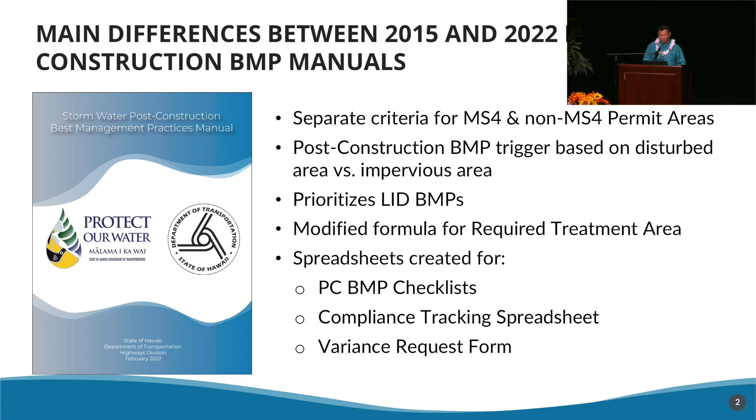We do have the links up here. If you visit the Oahu Stormwater Hawaii website, you can get some resources here. There's also a website for Stormwater Maui. If you click on the designers and contractors link,

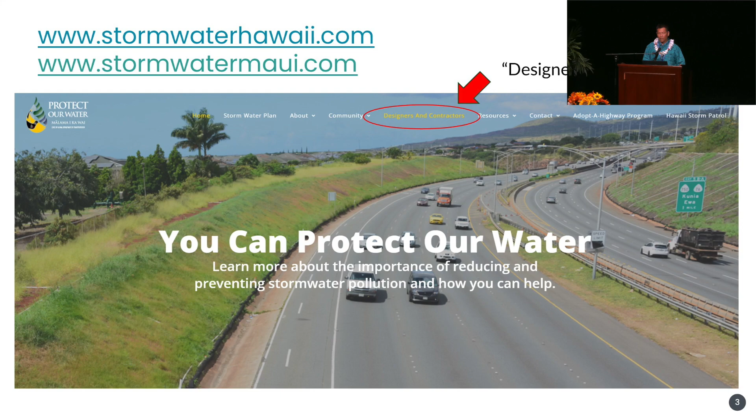that will take you to links that you can download to reference the 2022 manual. There's also links for videos and prior conferences that you can access for guidance, as well as some videos from 2023, and the 2015 original manual too for reference.

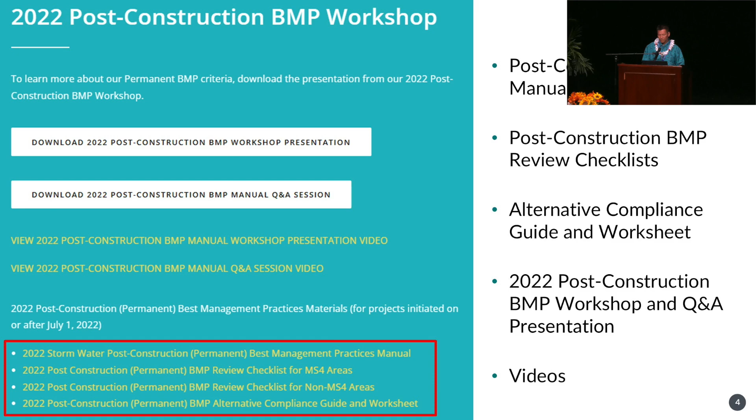This is a slide that I've used before because it is a journey, and we're always updating it and kind of tweaking it based on feedback we've gotten and questions. The initial workshops that we've done, because we changed the methodology, were a lot more technical — we went into the formulas and really into the weeds about the changes. But the latest updates are more just to be user-friendly for the user.

And so we did updates to the MS4 permit area checklist, the non-MS4 checklist, as well as the compliance tracking. Richard's going to talk about some of the local and nationwide trends that we've been seeing in the stormwater industry. This picture here is one of the bioswales that we've done near the H3 Likelike intersection.

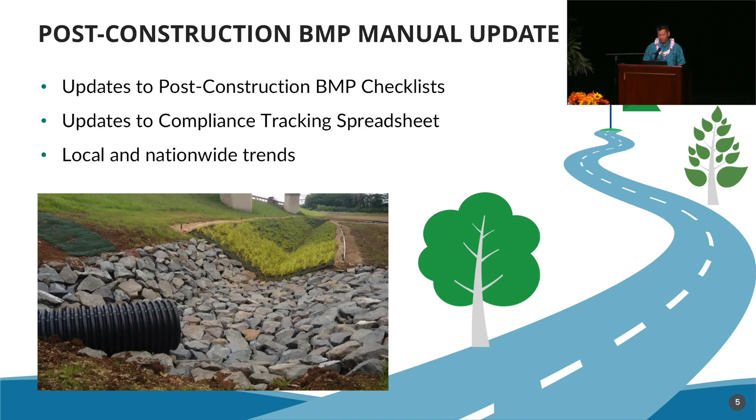Some of the general changes to the post-construction BMP files that were made.

So we've added several tabs along the bottom, and this is what you'll see when you open the Excel spreadsheet. So there's the overview and guidance tabs that have been added. The intent for these is to make it easier for the user, so instead of having to flip back and forth between the actual manual and the spreadsheet, we included some tips on how to navigate through the tabs.

You'll find within the spreadsheet there are the checklists included, as well as the tracking spreadsheet, variance request form, and then there's now separate files, so the user will have one file that they can fill out. And then from the DOT side, they have another spreadsheet that they use to track files on their end, and that's generally just for compliance.

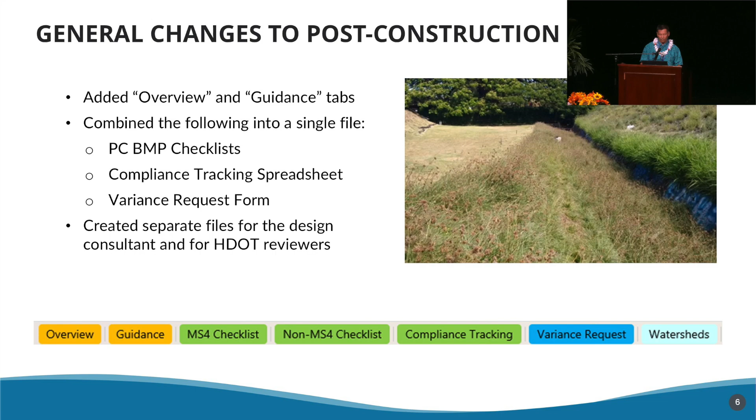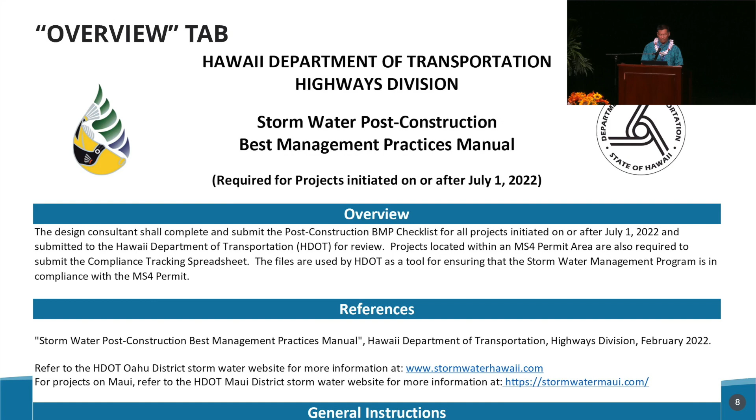So the overview tab is just instructions on what files are included. It does have some links for the Oahu and Maui websites for a quick reference, and then also instructions on how to navigate through the different tabs.

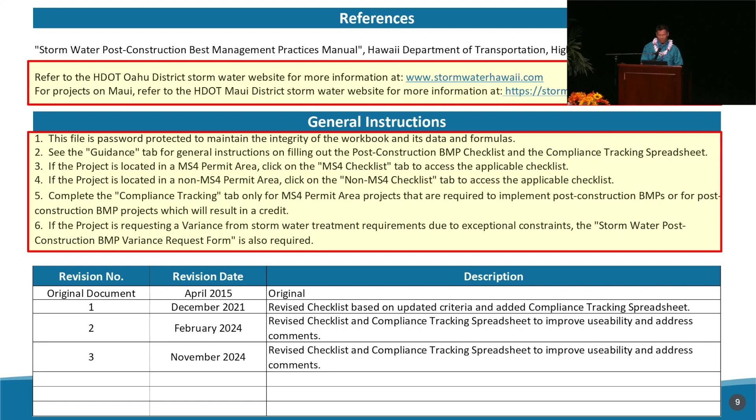The guidance tab is probably the one that you're going to find the most useful. So we did add colored cells throughout the worksheet. You'll find that the yellow ones are where the user adds in their information based on their project. The green cells are locked out because they either have formulas or they're going to be filled in automatically.

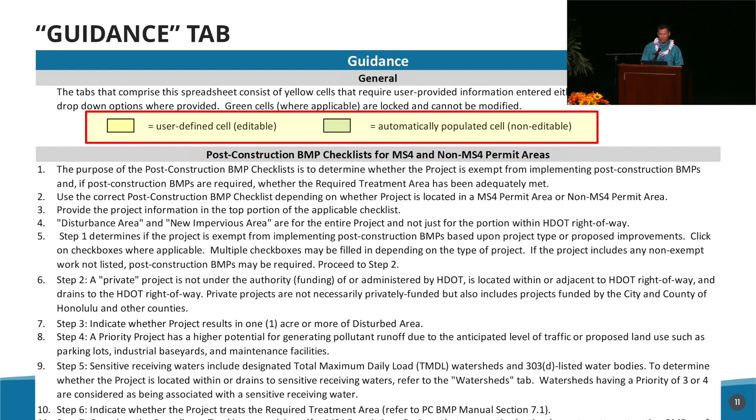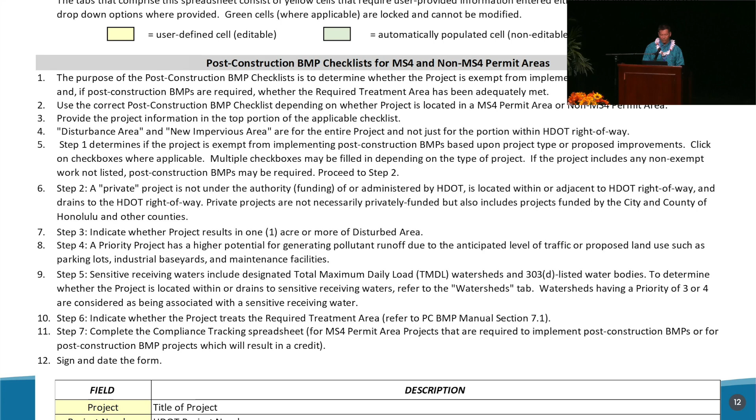And it has instructions for each of the different worksheets. So for the BMP checklist, we do have a series of steps that you follow. Apologize, we have not integrated AI yet, so you do have to fill it all out. There's not going to be an automatic feature, at least not yet. But you have to follow step by step, and hopefully it's pretty clear as far as what you need to do. Once again, it's mainly so that you don't have to keep referring back to the manual.

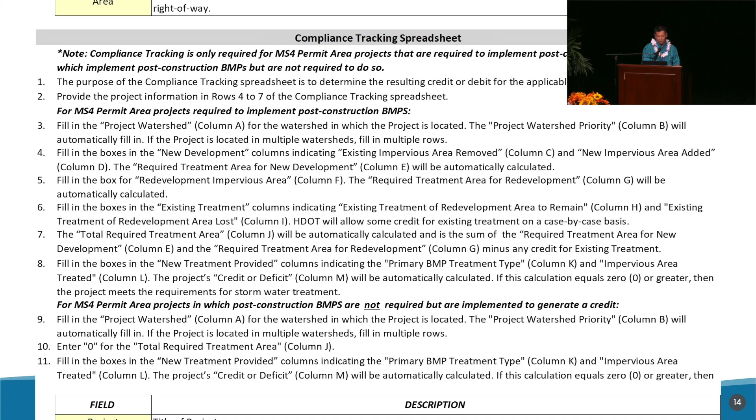So we do have the fields, a lot of the terms that are used within the worksheet, and the definitions. And then also we added some steps for guidance for the compliance tracking spreadsheet, more descriptions and definitions, and some links are included. The goal for the tracking spreadsheet is to compute how much credit or deficit is resulting for your project.

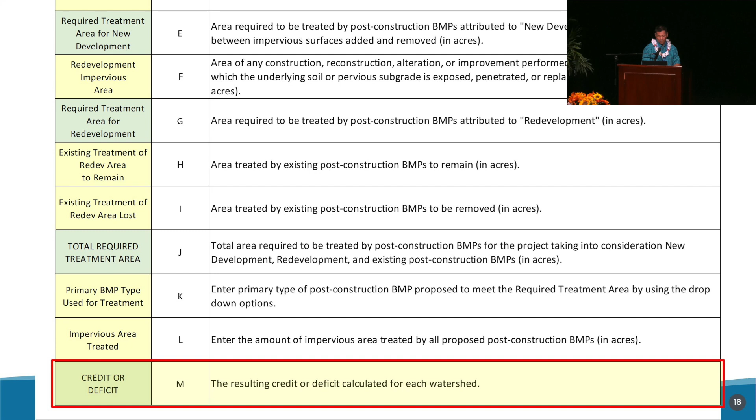And then lastly, we have instructions on the variance request form.

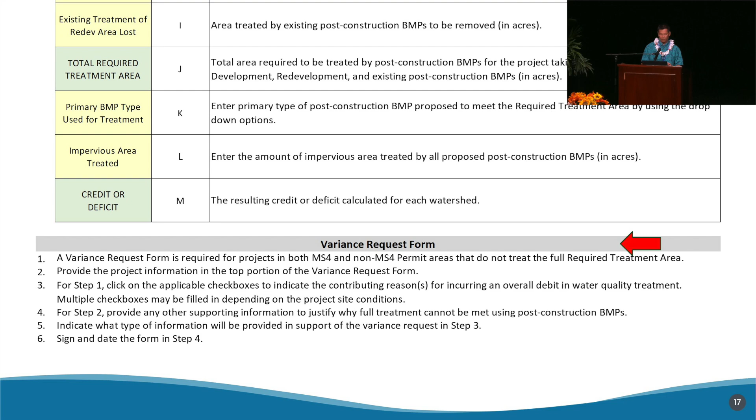So most of the questions we have are on how to fill out the post-construction BMP design checklist. These are the questions that come across either from the DOT side or from users that we've heard. As a reminder, the checklist itself is required for all projects initiated after July 1st, 2022 that need to be reviewed by HDOT. We do have separate checklists, so make sure you use the right one, whether you're in an MS4 permit area or a non-MS4 permit area.

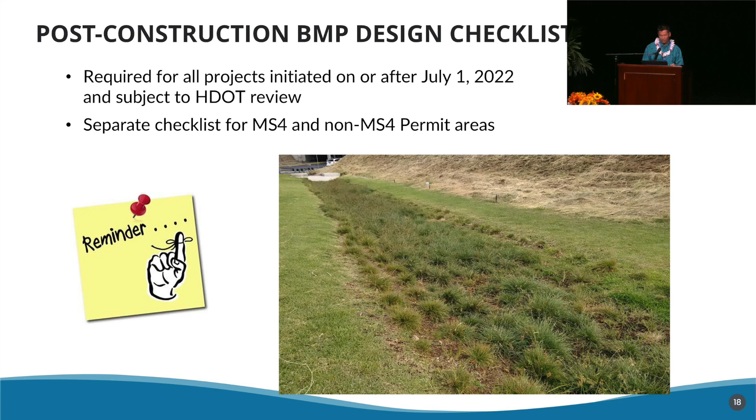I'm going to go over the MS4 permit checklist. The non-MS4 one is pretty similar. So we added some drop-down menus to make it easier to enter in information. The yellow is where you have to add in your info. One of the first questions we get is, how do you determine which watershed your project is located?

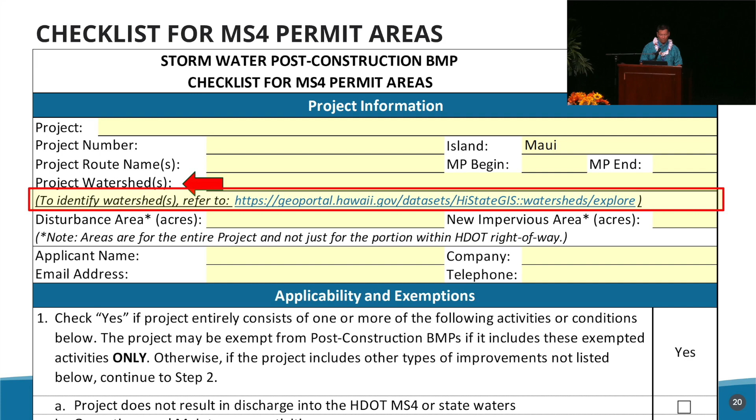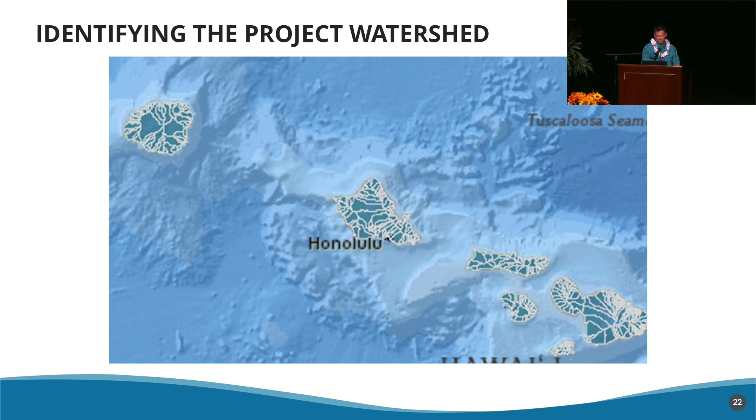So we added in a link, and if you click on it, it'll take you to a GIS website. It's pretty cool, as you scroll around you'll find it'll highlight the different watersheds and flash up which watershed that is. So whichever your project is, if it spans more than one, make sure you enter in all of the watersheds in that blank.

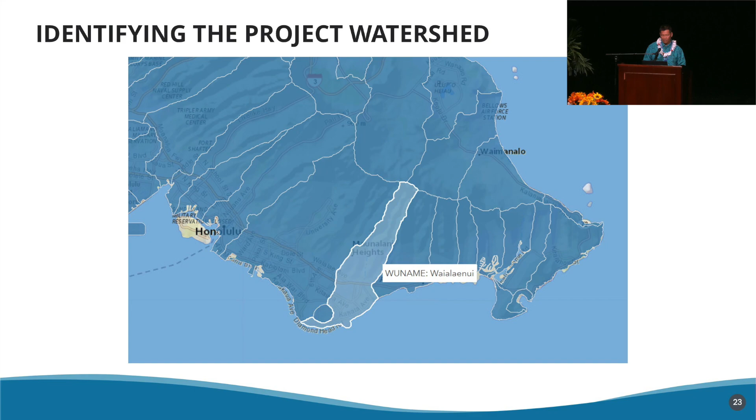And then continuing down on the checklist, step 1 is intended to determine whether your project is exempt from implementing post-construction BMPs.

So the first question is, does your project discharge into the HDOT MS4? If not, your project is exempt.

That's pretty easy. One of the questions we've always been getting is about erosion and sediment control. So to go through the exemptions, if your project includes work that is not included on one of these exemptions, then it needs to be assessed for post-construction BMPs. So even though your project has erosion sediment control, you're not automatically exempt. For example, if you're doing a 2-lane road, just because your project has erosion sediment control, it's not exempt. So you need to indicate all of the items that are within your project.

If your project is exempt, you continue down to step 8. If not, you continue to the following steps, number 2.

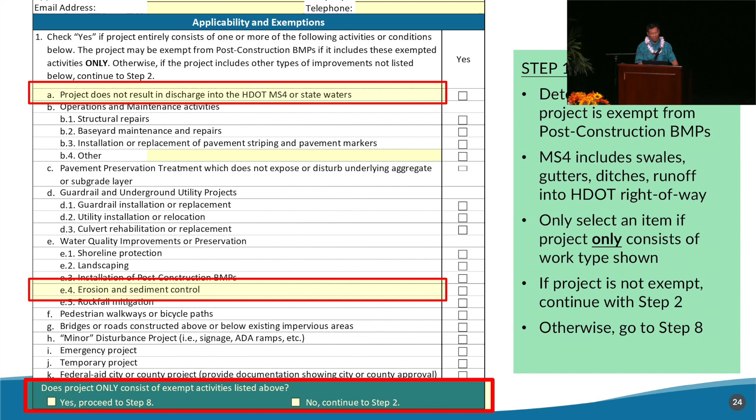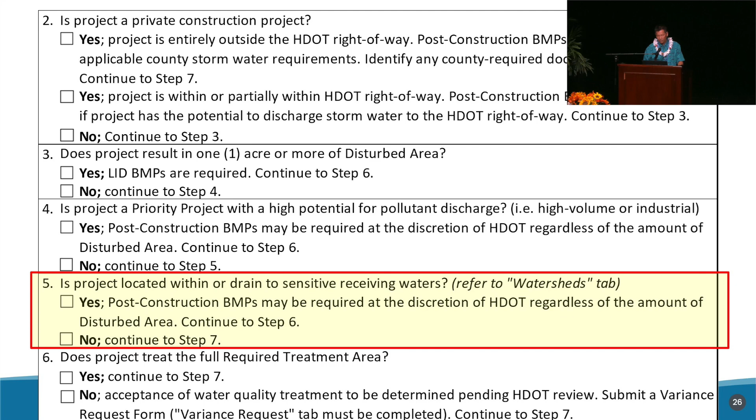Okay, and then these are more steps that you follow to determine what is needed for your project. One of the other questions we get is, how do you know if your project is within or drains into a sensitive receiving water? So we added another tab here for watersheds. Based on your watershed, each watershed has a priority ranking, and if you have a priority of 3 or 4, those are considered a sensitive receiving water.

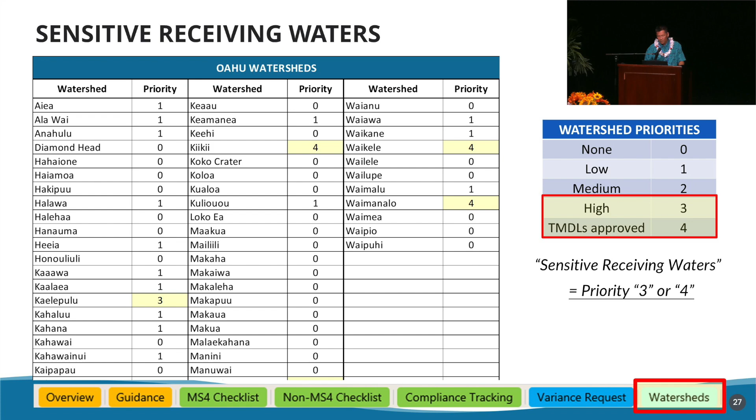And these rankings are based on the State of Hawaii Water Quality Monitoring and Assessment Report. It's updated every 2 years by Department of Health. They do a series of testing for pollutants, and that's how they come up with their ratings. There's a link here if you want to take a look at it.

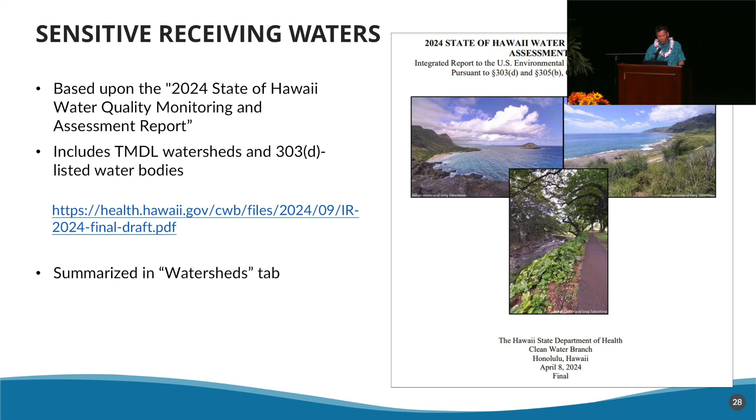The signature from the designer should be someone who's knowledgeable of the project. We want to make sure the information provided is accurate. And then the steps down below are for the HDOT reviewer.

Initially we had three outcomes, but we added this 4th one. So the different outcomes are: the first one is if your project does require post-construction BMPs, and if it does meet it, you're fine. The second option we have highlighted here is the new one we added.

Some projects do not require post-construction BMPs, but they include them anyway to get the credit. So we do want to capture that credit for compliance. That option has been added.

Options 3 and 4 are if the project does not meet the criteria. The options are either you have to go back to the drawing board and add more BMPs, or if DOT thinks you're okay because there are constraints preventing you from meeting that requirement, your project may be open to using alternative compliance. Alternative compliance is basically using another project in the future to address the deficit.

And then for the reviewer, we also added another signature block for DOT branch head to sign.

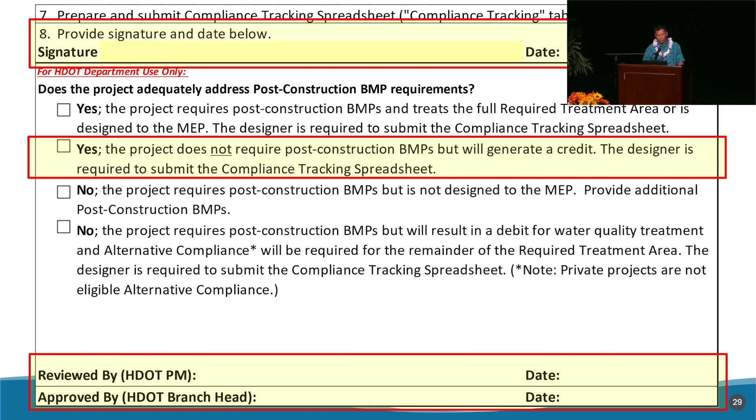In addition to making the files more user-friendly, we're trying to cut down on the paperwork. So one of the comments we had was for the post-construction BMP compliance tracking spreadsheet.

Before, every project that submitted for review needed to submit this as well. But we've narrowed it down, so you only submit this if your project is required to implement post-construction BMPs, or if your project is not required but you're adding them in to get the credit. We want to get the credit. So those are the projects that need to submit this spreadsheet.

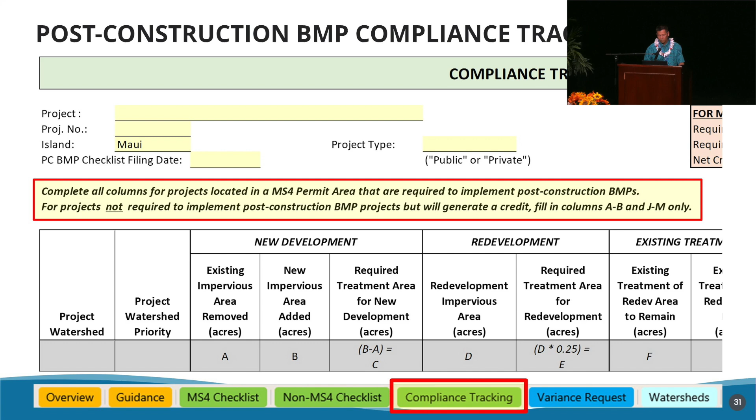And then the BMP variance request form. So if your project is required to implement BMPs but does not meet the required treatment area, this is just your way to justify why it does not meet that. And then DOT is going to review it, and if they approve it, you could be open to using the alternative compliance option.

As far as the timing, we anticipate updating the files and the manual itself and having them ready for public use, either first quarter of 2025 or the first half of 2025.

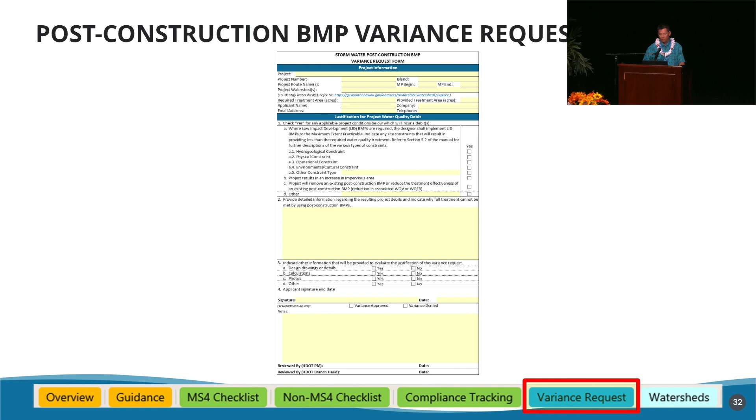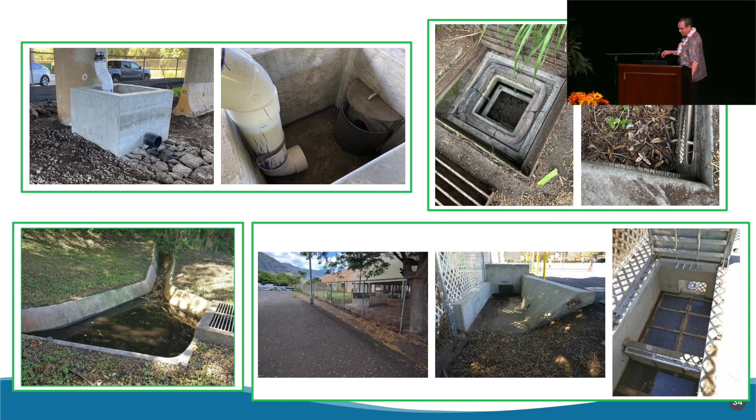I'm going to talk a little bit about trends in municipal permitting, but specific to our permanent BMP program.

I tend to get excited when I talk and jump around, so if I start getting over here and you can't hear me, throw something at me, and I'll try to remember what I'm supposed to be doing.

When we talk about post-construction BMPs, the requirements vary state by state. There's kind of different approaches to the permitting that drive it. In a lot of states, the regulatory agency, equivalent to the Department of Health here, writes their own compliance manual. In the state of Washington, where I live in Seattle, they have a very detailed 4-volume stormwater management program guidance.

That guidance includes a whole section on permanent BMPs, and they actually allow local municipalities to create their own manual, as long as it's at least as stringent as the state manual. So you have the state manual, and then the City of Seattle manual that adds some new twists and turns to it. Depending on where your project is, you have to comply with all of these different regulations, so it can get kind of complicated.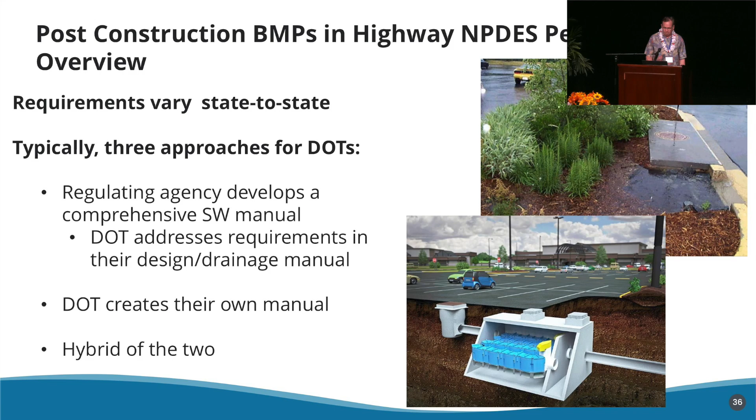Then there's some places where it's kind of a hybrid of the two, where the state provides some level of guidance, and there's bits and pieces of the manual here and bits and pieces there. It can vary, and that affects how you implement and run your program.

In terms of trends we're seeing in post-construction BMPs, anyone here that's been working under a stormwater permit for more than 5 years has seen the process where every time you get a new permit, they tighten the screws a little bit, things get tougher, and there's more requirements and new things you have to add. It's true in the permanent BMP world.

One trend across the country, I think, is reducing the size of the trigger for your project. The City of Seattle, for example, if you have 750 square feet of disturbed area, requires drainage review, and they have a whole green stormwater infrastructure, LID checklist you have to go through to prove that you can't do permeable pavers, rainwater harvesting, a rain garden, or whatever other options might be, before you're allowed to get an exemption and move forward.

Within that review, they have multiple trigger levels, because that's just the simple green stormwater review. But if you then have 2,000 square feet of new or replaced impervious area, you're required to do permanent BMPs, like a Contech StormFilter, or any one of these other treatments, either in addition to or as an amendment to the LID work you do.

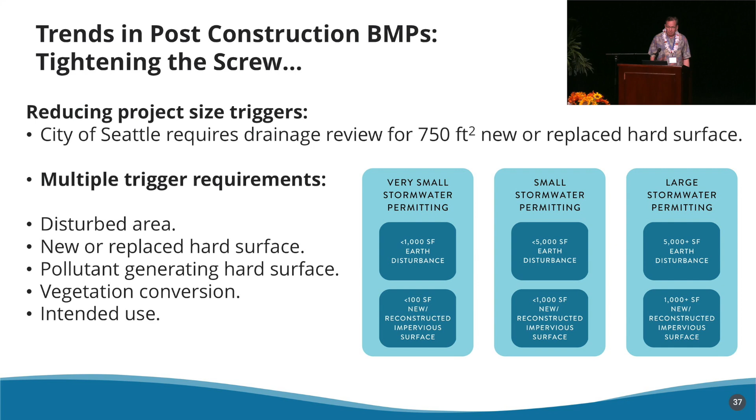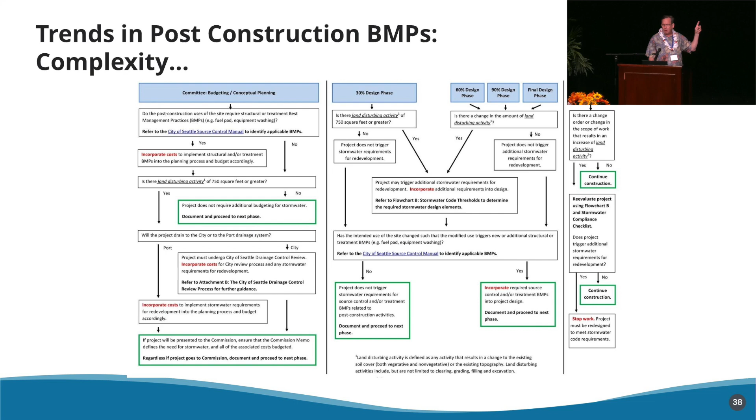And this isn't even the whole flow chart, because if you get to the wrong box on this one, then it sends you to another flow chart and you've got to work your way through that too. So it's an involved process.

So I think the word for the wise is, in the future, you can probably only expect to see more interest from the regulators in seeing you do more and adding complexity to how you do this. So for those of you who aren't as happy with Jason's spreadsheets and the requirements we have in there now, realize that we're still getting away pretty easily here in Hawaii.

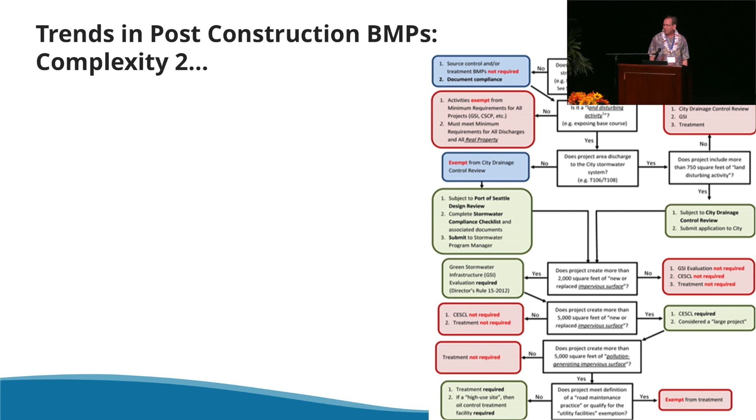The other way this is often done is a developer will come in and put in a regional treatment system that treats a whole huge area, even if they're not developing it all today. Very similar to the credit program Jason was talking about, in that if they have a 40-acre site, they'll put in treatment for the entire site, and it may take them 5 years to develop that all out. In those 5 years they might develop 10 acres, then another 10 acres over here, and then they get another tenant that wants to build a warehouse, and they already have all of that covered, so it facilitates their business process very well.

And typically you see greatly reduced costs, because instead of trying to build 20 little small rain gardens and fit them into the site you have available, it allows you to build at a larger scale and generally lower cost.

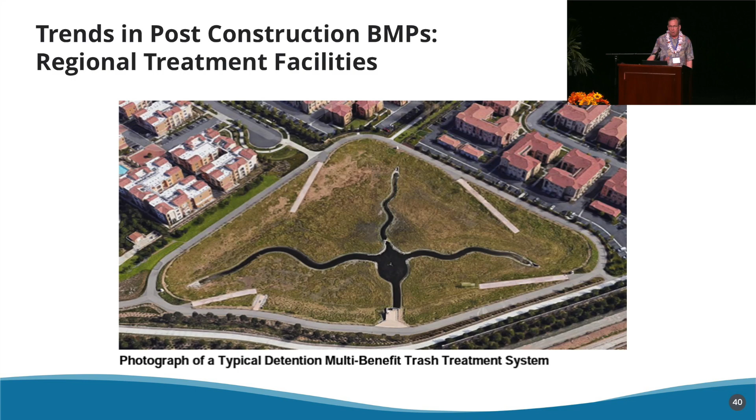The other trend in this is what they call stormwater parks. These can range—probably the most common one I've seen is soccer fields that are set up in such a way, with the elevations and floodplains, that in a really large storm they're able to divert stormwater and flood the soccer field 6 inches or a foot deep. That's a whole lot of water you're able to retain and infiltrate, or at least release slowly back into the stream so you avoid the impacts of the large flows.

The project I'm highlighting here is in the city of Tacoma, and they retrofitted a whole large area. I believe it's 754 acres that drain to this facility. It's a series of infiltration rain gardens.

Anyone here ever been to China or Japan? Lo and behold, it took us 2,000 years to come back to the idea of terracing our treatment down the hill, so we get some treatment and then drop it down into the next one, and it just stair-steps its way down the hill. It's in a park, and provides a visual amenity because you've got variation in the plants and the pathways through it.

And then I wanted to touch a little bit on new trends and permits that are maybe not yet affecting our post-construction BMPs, but will be soon. In Washington, our latest municipal permit has a requirement for avoiding disturbing PCBs and materials. Now, I thought we stopped using PCBs a long time ago, right?

We took them all out of the transformers and put double containment on everything that does still have them, and I didn't think it was an issue. I didn't even realize that back in the 50s and the 60s, PCBs were put into caulk and siding material and window gaskets. So we now have a prohibition against pressure washing the outside of a building unless you've tested the materials to make sure there's no PCBs in them, because that caulk is now breaking down, and when you pressure wash it, you're blowing pieces out, and the PCBs are leaching out of it.

It was an eye-opener to me, because I've been an environmental professional for 30 years, and I kind of thought there's a lot of legacy PCBs that we're still cleaning up because they're there forever, but they're now cracking down on it in stormwater permits as a pollutant of concern.

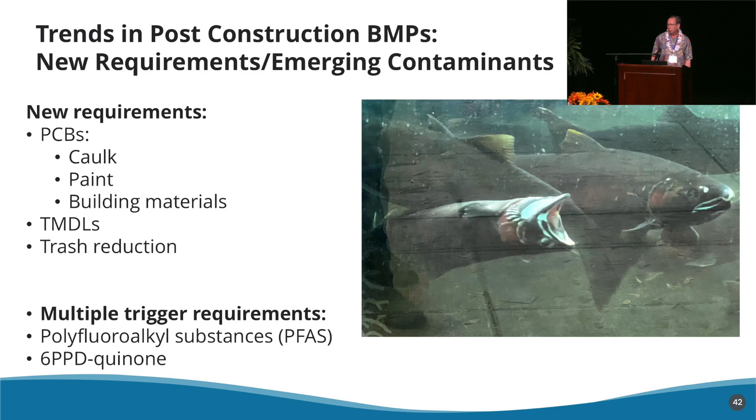The good news is it seems to be filtered out pretty well with bioretention, like rain gardens, and that compost sand mix soil mixture seems to sorb the stuff out pretty well. So that's going to be a big push, at least in Washington - we'll see.

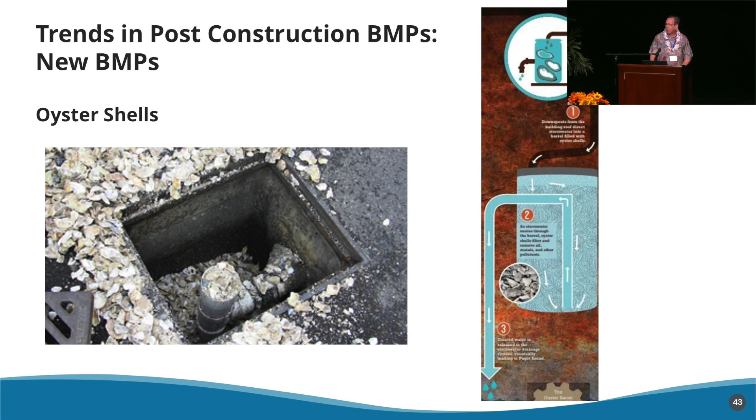And then I've just got a few pictures to show you of some innovative BMPs. The Port of Seattle does a lot of work with oyster shells for treating metals. You tend to need pretty long contact time, but they put it in catch basins, and they do barrels of oyster shells that they put under downspouts, typically when they have a galvanized metal roof.

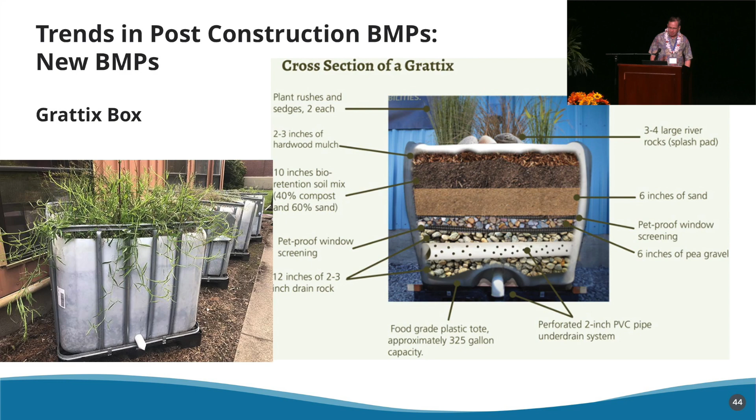I've used these where we pump water out of a manhole into the box, and the plants take up some of the pollutants, and they're very effective.

And then I'm seeing a lot of people doing custom versions like that Grattix box. I've seen a number of locations where they spent $1 million on a fancy brand name filter device to treat their stormwater, and it didn't get them to the levels they needed for their permit compliance. So they've ripped out the guts of the thing and just used the concrete box that's there, and they're putting in different layers of materials, everything from oyster shells.

Biochar is the new silver bullet in stormwater treatment - it's basically charcoal. They do it a lot with things like walnut shells, and you need to get the right sort of consistency to have enough surface area, but not ground so fine that it then doesn't let the water go through, so you get the flow through.

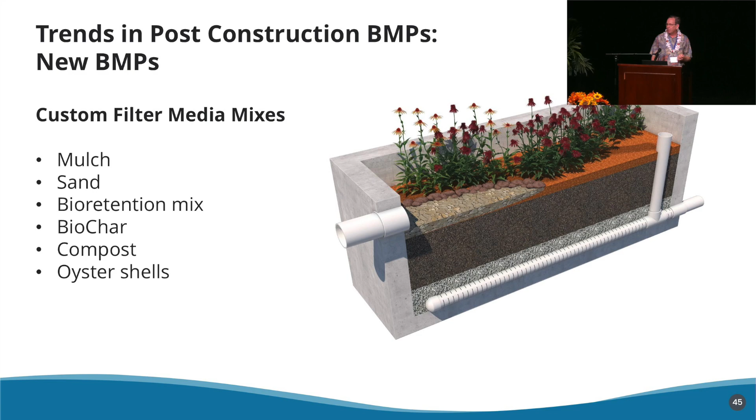But it's an interesting process, and there's a lot of people that have given up on buying expensive treatment, and they're just experimenting with their own stuff, and then redoing it until they get it right and find one that works for whatever their pollutant stream is. So I think it's an interesting idea.